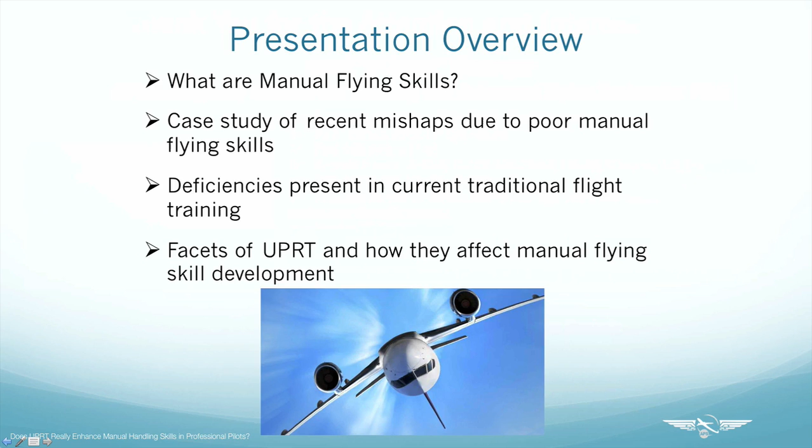So again, does UPRT really enhance manual flying skills in professional pilots? This is a broad question, encompassing both objective and subjective subject matter, which spans many different facets of aviation. First, the term manual handling skills needs discussion and definition before we explore the rest of this.

Manual flying is generally thought of as those flying abilities a pilot uses to fly the aircraft only by reference to the raw data presented in the forms of airspeed, attitude, altitude, vertical speed, and so on, through direct manipulation of the controls without the aid of automation. This automation includes, but is not limited to, autopilot systems, autothrottles, and the variety of flight management systems currently equipped in many modern-day aircraft. These skills include complex problem solving in a crew environment, with time as a critical factor.

Basic navigation equipment usage and manual trim adjustments can be considered manual flying as well, depending on the sophistication of the equipment. Taking this a step further, especially as it relates to modern aviation, a pilot's flying technique may combine the already mentioned manual flying skills with combinations of automatic speed and direction control and guidance. These combined inputs usually occur through individual pilot habit patterns or preferences, procedural requirements, operational standards, or when automated systems fail. The latter of these instances, the failure of automation, is a circumstance that is rare, but is cited as a contributing factor in several recent and deadly crashes.

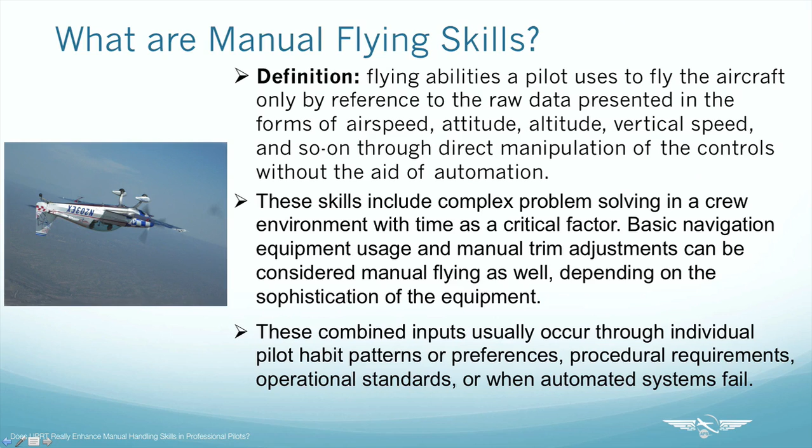So, examination of some recent fatal accidents in the industry can provide very valuable insight into the importance of manual handling, especially for pilots flying more sophisticated aircraft with advanced flight control and automation systems. The first one we'll look at is China Airlines Flight 140. We'll follow that with a look at Colgan Air Flight 3407, and finally, Air France Flight 447.

The first example here, China Airlines Flight 140, was an Airbus A300-600R, which crashed on an approach to runway 34 at Nagoya Airport, Japan, on April 26, 1994. The co-pilot, who was the pilot flying at the time, after several inappropriate activations of the go-around mode on approach, and several subsequent cautions from the captain, inadvertently selected the takeoff go-around, or TOGA, mode on the approach. The aircraft pitched up and immediately stalled.

This led to a loss of control and a tail-first impact with the ground. The crew failed to recognize the stall or apply appropriate manual handling skills on manual approach. The reliance on automation and unfamiliarity of the crew with manual handling characteristics of their particular aircraft led to the deaths of 264 people and 7 more injured critically.

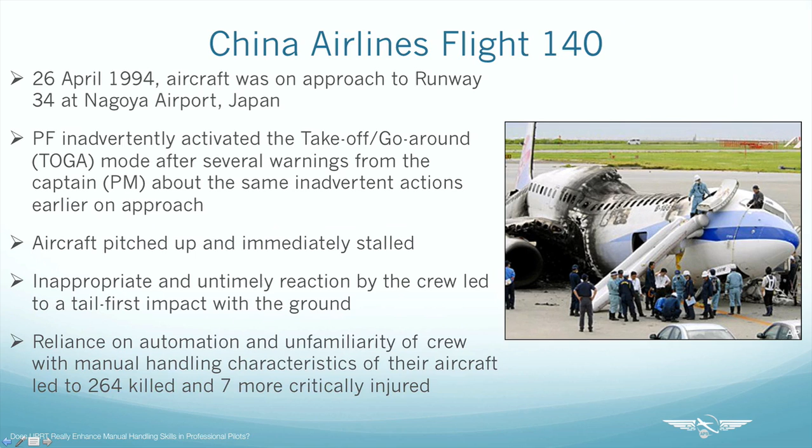The second mishap is much more recent. This is Colgan Air Flight 3407, a DHC-8-400, which was on a code-share agreement with Continental Airlines, and it crashed into a residential area near Buffalo Niagara International Airport while on an ILS approach at night in visual meteorological conditions.

The aircraft entered a stalled condition due to improper power settings and airspeed control, and the crew reacted by pulling on the control column, which increased the angle of attack further and worsened the stall condition. The aircraft responded by rolling one direction and then the other, culminating in 105 degrees of bank and 25 degrees nose low before impact with the ground.

Following the crew's inappropriate reaction, the crew lost control of the aircraft, which resulted in the fatal crash that killed 49 and one person on the ground.

Finally, and much more publicized worldwide, is the crash of Air France Flight 447, an Airbus A330-200 that departed Rio de Janeiro, Brazil, on June 1st, 2009, and crashed into the Atlantic Ocean en route to Paris, France.

After a two-year-long multinational effort to find the crashed aircraft at the bottom of the ocean, the wreckage was finally recovered.

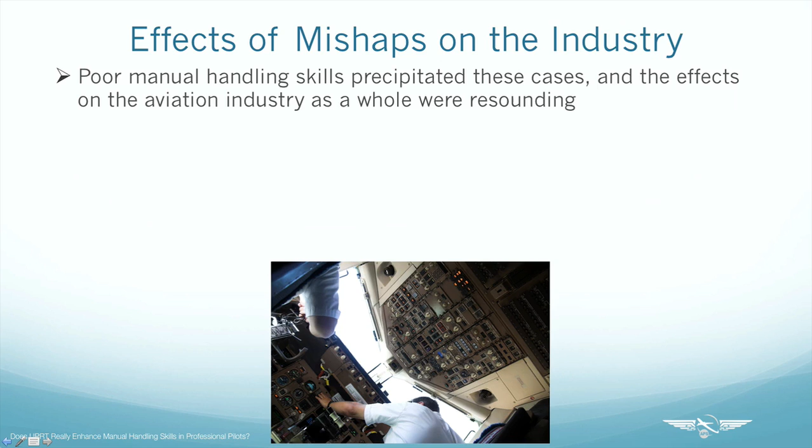So it becomes painfully clear that manual handling, as described earlier, is a critical dimension to the professional pilot's skill set. The public outcry over the discovery that Air France 447 went down as a result of a loss of control in flight, exacerbated by an inappropriate crew response, accelerated a long overdue response from the industry that was set in motion by the Colgan accident.

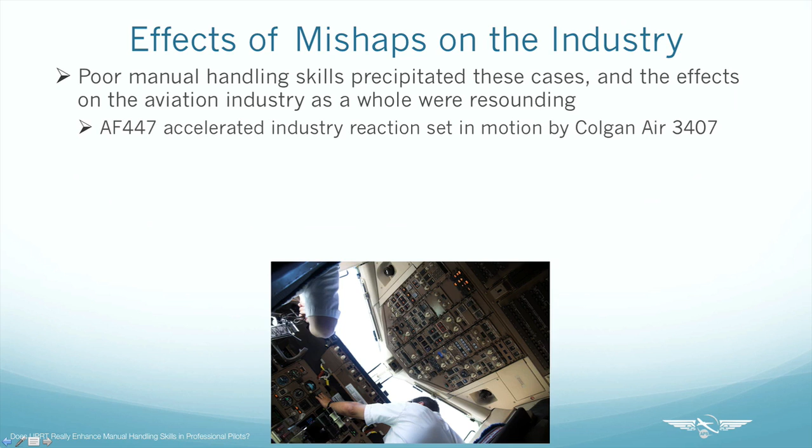Andy Pasztor of the Wall Street Journal wrote: "The latest revelations, according to safety experts and others familiar with them, are likely to add pressure to revamp training practices to help both new and experienced pilots cope with high-altitude stalls, upsets, and faulty airspeed sensors."

That was written in 2011, and shortly following that, a massive reappraisal of pilot training practices throughout the U.S. occurred, and the industry faced pressure from the public and government to address the deficiencies in training that caused these events.

Examination of the undue reliance on automation led to the conclusion that the incident could have been avoided had the pilots received more training in manual flying and stall recognition.

This all resulted in new ATP rules in the U.S., which focused on the undue reliance on automation that many air crews have.

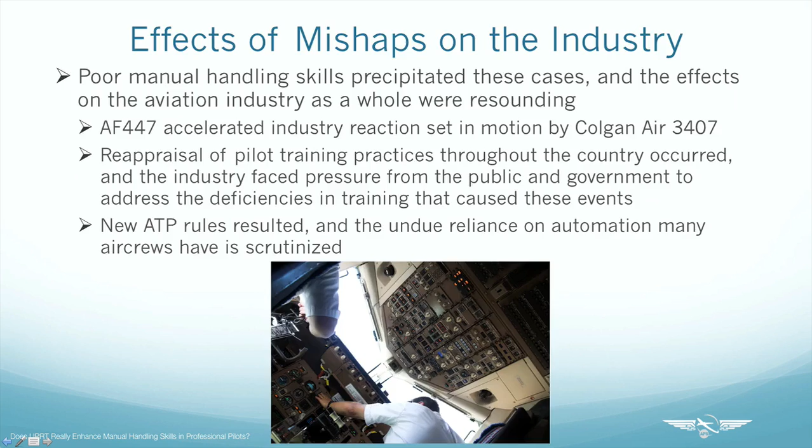All too often during traditional flight training, stalls and upsets are treated as scripted events, where the setup and approach to the maneuver demands more focus than the recovery itself.

A pilot untrained on upset prevention and recovery possesses manual handling skills acquired from their traditional flight training. This training, in most cases, is designed to satisfy the respective national aviation authorities' testing standards in the country of training for certification of pilot licenses.

In other words, the training is designed for the student to pass a check ride. Great emphasis is placed on procedures used to prepare and configure for a very limited set of stalls and unusual attitudes.

Rich Stowell, a multiple-time Master CFI, aerobatic pilot, and published flight training author, stated: "Treated as an independent maneuver unto itself," in reference to stalls and unusual attitudes during certification training, "the whole ordeal is often enveloped in unnecessary melodrama as well. The actual lessons learned, however, are fear and a false association between the stall and slow airspeed."

As a result, all too often a poor and dangerous strategy may develop that seems quite plausible: flying faster to provide a larger margin against these stalls that are misunderstood and perceived as frightening.

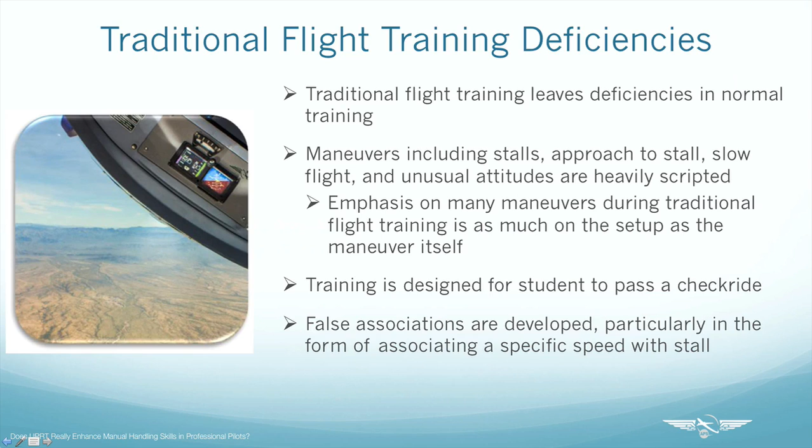This shows an inherent weakness in UPRT-deficient pilots, or more succinctly stated, a gap of knowledge exists on a critical portion of the aircraft's performance: the stall, which is the leading cause of loss of control in flight.

Upset Prevention and Recovery Training seeks to close that gap, to fill in those missing pieces of learned manual handling ability through a variety of means.

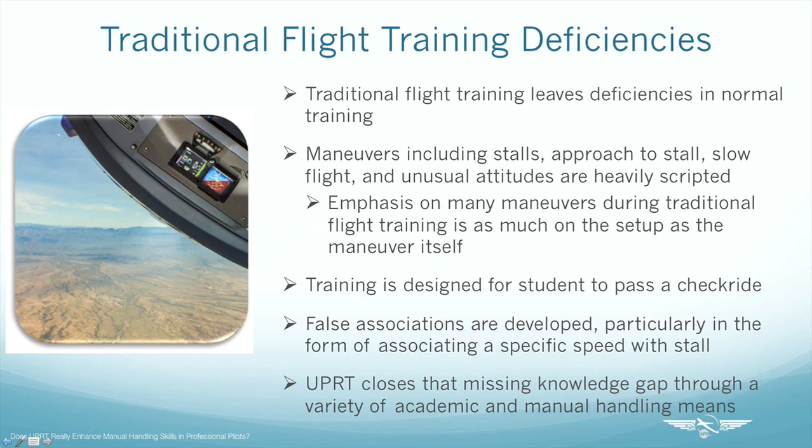The first step in the process is an expansion of what can be termed book knowledge, through examination and review of those aerodynamic factors that apply to all fixed-wing aircraft.

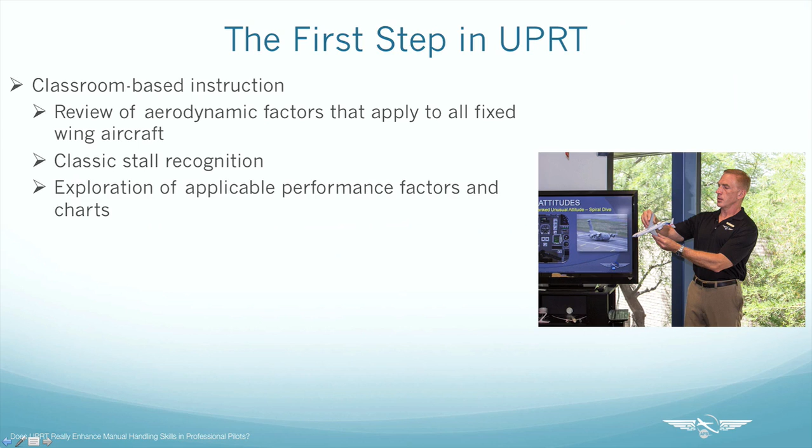Classic stall recognition and techniques for recovery are covered. Exploration of applicable performance charts relating load factor, bank angles, velocity, and other aerodynamic subjects is conducted, and case studies highlighting proper and improper use of recovery procedures are detailed.

This portion of UPRT is absolutely vital and sets a solid foundation for understanding.

The understanding needs to be why prevention and recovery steps are designed the way they are. Armed with this knowledge, the UPRT pilot in training is equipped to execute on-aircraft training using the techniques and strategies covered in the classroom. So this classroom step in UPRT is absolutely vital and provides a foundation.

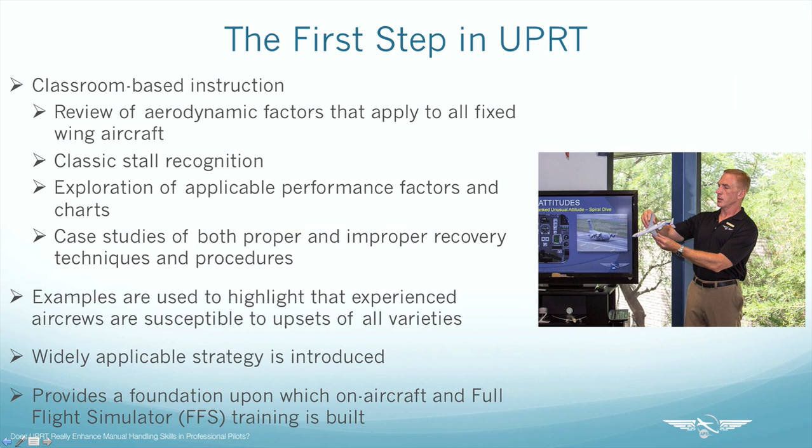upon which all the future training will happen. The on-aircraft training, if there's flight simulator training involved in the program, it's absolutely critical. On-aircraft flight training in an appropriate aircraft is the next step in UPRT.

An aerobatic capable aircraft is recommended by several different regulatory agencies, including the FAA and the International Civil Aviation Organization, or ICAO. They recommend conducting on-aircraft UPRT in aerobatic category aircraft to expose pilots to maneuvers such as uncoordinated stalls and spiral dives, which would, in a normal or transport category aircraft, put the crew at high risk to enter spins or other loss of control in flight events that could be unrecoverable due to decreased safety margins in those aircraft types. Aerobatic aircraft have a much higher safety margin and ability to conduct all attitude and all envelope training than other aircraft types, particularly transport category airplanes.

This point begs the question, can jet pilots really learn upset prevention recovery in a single-engine piston airplane? Well, the answer is in the question itself. A jet is an airplane, subject to the same general aerodynamic laws as a single-engine piston aircraft. Granted, each has differences in pitch moments with power changes, keel effect, turning tendencies, and yaw damper considerations, among many other things. But these differences make up an estimated 5% disparity between aircraft types.

With that said, the training industry agrees that type-specific considerations are critical to effective UPRT skill development and must be comprehensively addressed during type rating and recurrent training. But overall, an airplane is an airplane, and virtually all pilots begin their careers in the same kind, a single-engine piston airplane. Upset training is intended to be transferable. It should follow a pilot through his or her career, and thus the tenets taught during early training should be relatable to any fixed-wing aircraft.

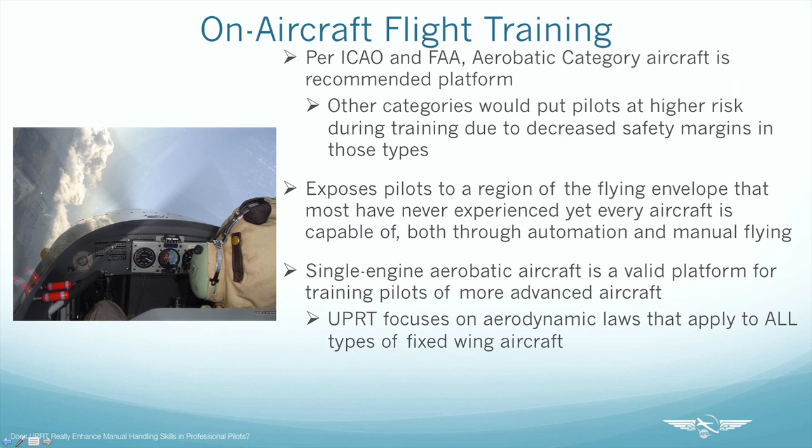That said, an aerobatic aircraft is clearly more maneuverable than other aircraft types, has a higher load factor limit, G-force onset rates, smaller turn radii, faster roll rates, and so on. However, most pilots of less maneuverable or more limited categories never truly see their aircraft, or any other for that matter, at the limits of or beyond what they consider normal flight parameters.

The closest most get to these parameters is the approach to stall indications during their once-a-year recurrent simulator sessions. They would never dream of using maximum aileron deflection or pushing on the control column or stick before or while rolling out of an upset. Accomplishing these techniques and many more exclusive to UPRT expand the pilot's awareness, their learning horizons, aerodynamic understanding, practical experience, and edge of the envelope experience.

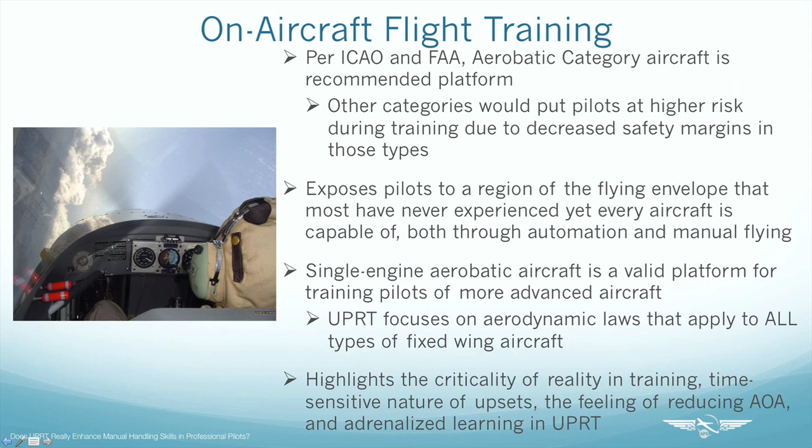Now, a final stage in UPRT is to place the pilot in training in a full flight simulator and practice these upset prevention recovery training techniques in a wide variety of situations. Once the basics of upset prevention and recovery and the general strategies are learned, it is equally vital to allow the pilot in training to experience these strategies in a full flight simulator that more closely resembles their normal flight environment. This allows them to realize fully that UPRT works in any airplane and helps them correlate the aerodynamic lessons they've learned during upset prevention recovery training and apply them to their own aircraft or one of a similar type and category.

Furthermore, crew resource management is tested, and UPRT is applied to this kind of environment, because manual flying doesn't always apply to only the pilot flying, but also to his or her crew members as well.

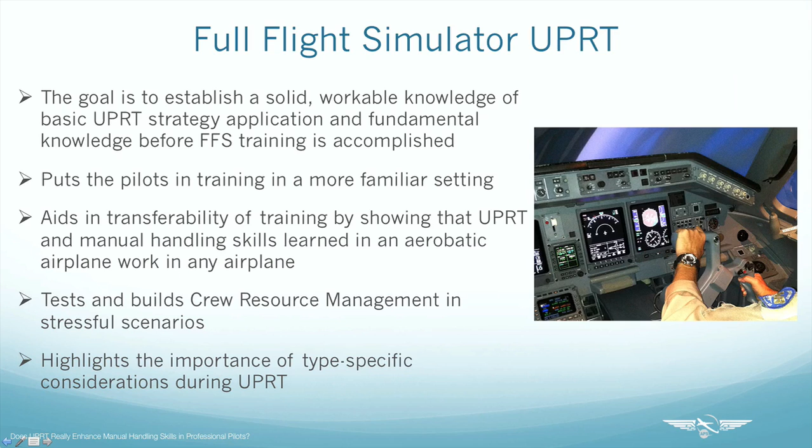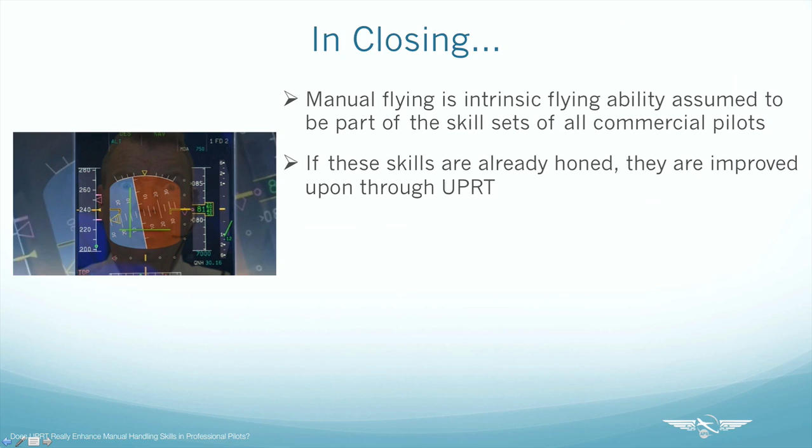Now, in closing, manual flying can be described as intrinsic flying ability, assumed at least by the flying public to be part of the skill sets of all commercial pilots. If present, even innate skills can be improved upon, polished, and expanded. If these skills are not present, they can be learned.

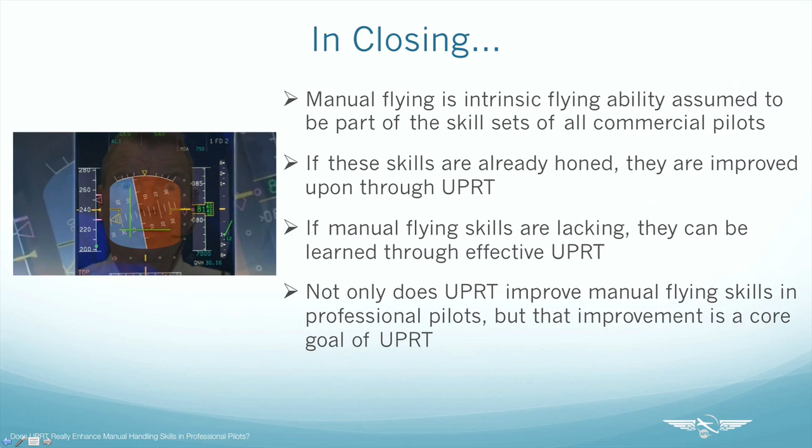Manual flying skills include everything from basic instrument reference and simple flight control inputs to complex problem solving in a crew environment when time is of the essence. Upset prevention and recovery training is aimed at improving and building upon these basic skills and teaching new ones for the unexpected. In a perfect world, use of upset prevention and recovery training would never be required. But this is not a perfect world, and the unexpected happens every day.

So, does upset prevention and recovery training really enhance manual handling skills in professional pilots? Absolutely, and without question it does. In fact, improving manual handling is a core goal of upset prevention and recovery training.

This is how I see it. Chance favors the prepared mind, Louis Pasteur once wrote. And upset prevention and recovery training is a critical facet in that preparation for every pilot.